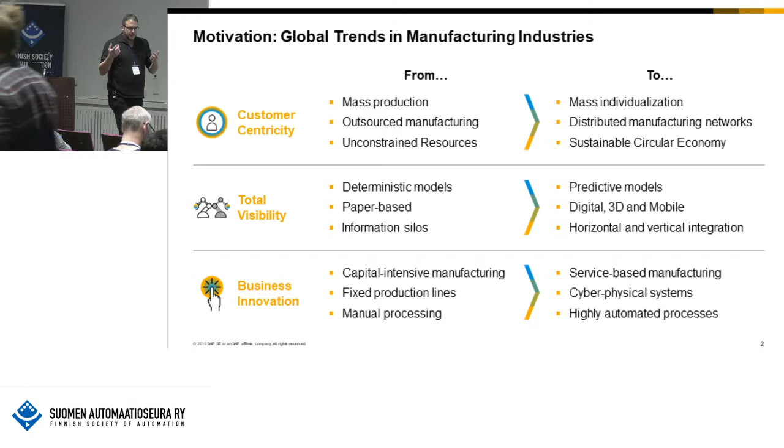But all of us, especially you, if you're representing a manufacturing company in discrete industry, maybe more than in process industry. If you're producing oil and gas somewhere, it's always oil, right? You might change from the same oil field somewhere outside, or after end of lifetime transfer from oil to gas, but these are only two products.

What I have in mind here is much more a company that offers, let's take it a little abstract. Today I produce a green and a yellow product. Everything is perfectly optimized, all my automation assets are connected using OPC UA and so on. So green and yellow product today, but tomorrow the market changes and everybody wants blue products. Now the question is, what do I have to do in my factory to enable my complete company and my factory, my automation, to be ready for blue products?

I think that should be for us all here in the Western industrialized world a driving factor. Certainly I can focus on perfect optimization of costs, overall equipment effectiveness, all this based on OPC, based on connectivity, etc. On the other hand, let's think about at every point in time when doing automation, making it ready for flexibility. That when I do green and yellow products today, the market will come and say I need blue products.

Or yesterday in another speech I had the example of a glass. Today I'm perfectly optimized for small glasses. The market changes, I need to deliver big glasses. And I certainly don't want to completely build up a new assembly line or a new factory only for big glasses.

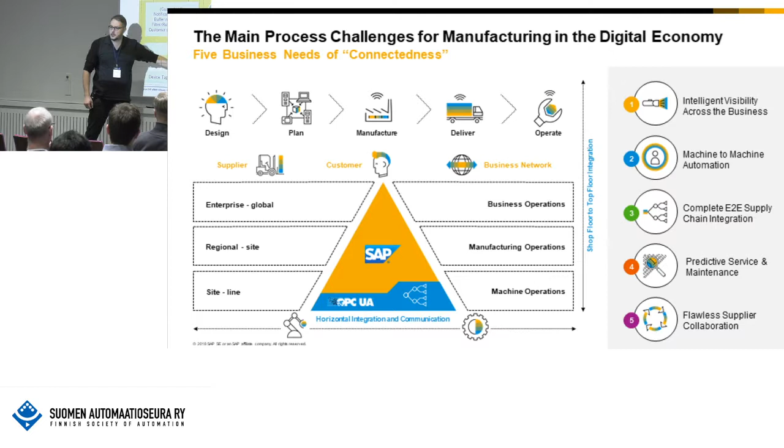I think the 90% case is here on the left side, this thing I call the notification scenario: somewhere a machine, sensor, measurement data, somewhere here a business system, business-like system—the manufacturing execution, the enterprise resource planning, or even the supplier. For example, watching the magazine.

From the sensor perspective, you get a measurement, a new value, an event, a counter, more or less a kind of fire and forget. Technically it could be a kind of pub-sub, but mainly legacy is certainly much more a client-server thing.

Value changes. It goes, in our case here, to something like a gateway, which could say, okay, let's say it's a classical temperature. Below 20 degrees, I don't care. Beyond 20 degrees, I have to inform somebody. Inform somebody could be anything. Is it just recording a time series for doing the big data story, the measuring and analyzing over ages? Or do I need to run in a transaction? So from 25 degrees on, I need to order flowers for my wife because I'm the maintenance engineer and I know if this machine is so hot, I will spend the night to repair it. Could be a transaction, why not?

Actually, it is just about saying notification scenario, relatively simple. On the other hand, I'm absolutely sure it's a lot of work in many cases if I have here a brownfield, an old machine, and so on.

The other side, the query scenario is - as an IT guy, when I first dealt with this area, I thought, okay, it's pretty much like having a simple database access. Select machine status from table. Unfortunately, these machines are not really like databases in many cases. So we have here, in the worst case, an old legacy protocol where I have to define the telegram to send to the machine: please tell me your state, and the response is another 100 characters.

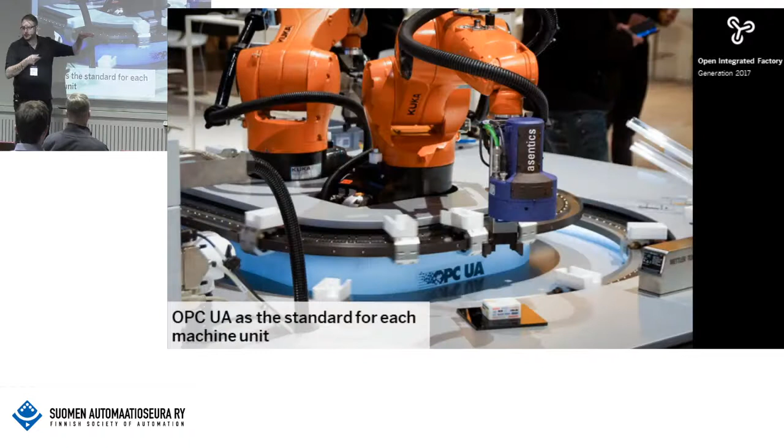Here we use a written buffer. We simply say the physical event that my carrier is on its way to this decision point already takes some time. That's the physical way, by the way also the photo that Stefan has shown. When such a carrier is on its way to do something, similar to this decision point of whether to do the extra order or not, let's assume I send this carrier to a position to do something. This physical travel time is already something I could use to acquire the data I need for this decision.

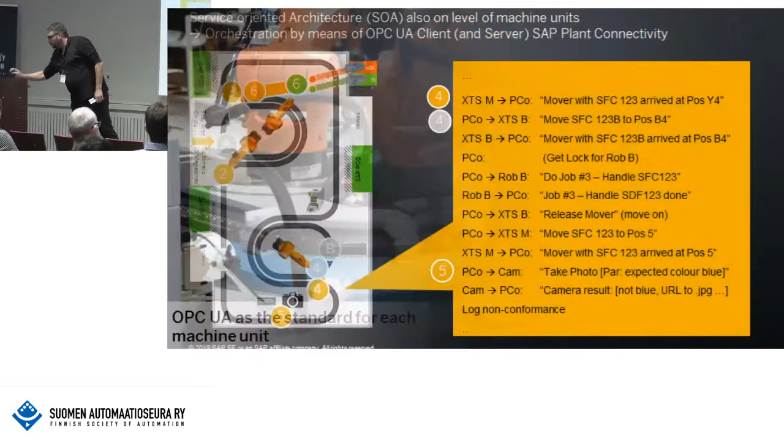So this information that I need later, whether the next order is a special one or not, is already acquired when I start here. When this carrier, these fast movers, arrive here, the memory of my gateway already knows this. So the response, am I a special order, is already known at the point in time when my carrier arrives. I think I have a little bit better depiction here, if I remember correctly. This one, yeah, that's what I wanted to say - let's take the shortcut.

Question? Oh, 5 minutes to go. I'm going out of time. But you got the idea that these business context-driven control loops are very interesting.

Fortunately, this is where I can refer to this morning when Stefan talked about this service-oriented architecture thing - this decision point saying, I am here as a carrier and I've arrived. Now what shall the robot do? Shall it go left or shall it go right? On one hand this is a decoupled business context-driven control loop. On the other hand, what you wanted to express this morning, Stefan, was this robot is just a kind of service provider. The robot can do multiple things. It's certainly taught jobs - it can do this job, but it can also do that job. And the question of which job to call is maybe dependent on this business context, on the order details.

This job for the standard order, this job as an extra check for the extra quality, picky customer check. That's what I want to express here - that we can configure such a sequence in a kind of soft logic controller. We're not doing the physical stuff here. In this setup, I don't tell the robot to start the motor of axis 1 and do 2 rounds and so on. It's much more that the robot knows I can offer a service - which service, the job number? Shall I do service job number 1, this one, or shall I do job number 2, this one? And exactly this decision could be dependent on my order details - master data, bill of material, all these things could be the influencing factor.

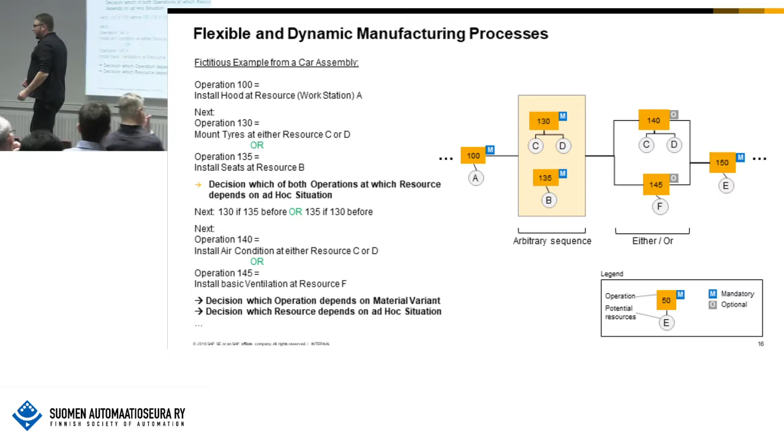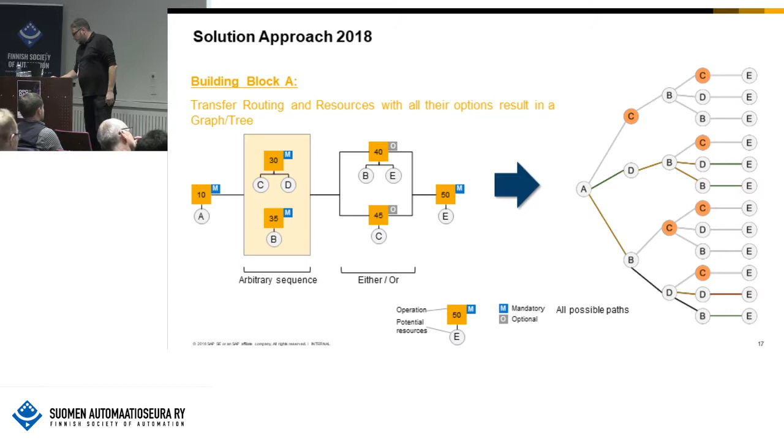For one order it might be relatively simple because one production order has, in such an example, one graph. So if I start here with installing the hood for my new Audi, whatever A3, I can decide, shall I go first to the wheels, shall I go first to the seats? A simple directed graph.

If we go from the perspective of many orders at the same time in a factory with many devices—seat station, wheel station, all connected via OPC UA, with live data on a near close sub-second basis—I need this live connection and sub-second basis for managing this complexity.

This is going then close to artificial intelligence, to make ad hoc decisions on a second basis. Because imagine, if this station is down at this point in time, I certainly want to reshuffle and say, okay, maybe I need 10 minutes to set this station up.

The maintenance engineer is coming and fixing some things, but in the same time, while this is down, I could send some of my vehicles to the seat station and catch up with the time later. So unforeseen, as always—human beings and also enterprise resource planning systems are planning, and the gods are laughing and saying, haha, I spoil your plan, this station is down, take a new decision.

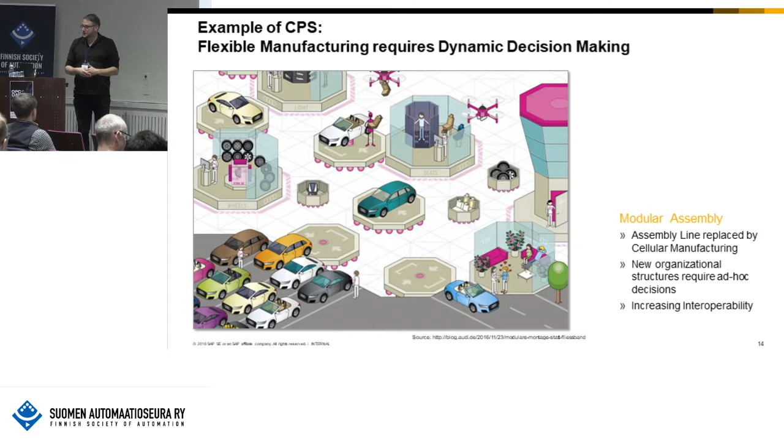Here I think there's a lot of potential, independent from SAP, for many of us to say, use OPC as my ears and eyes into reality, and now we are combining this with artificial intelligence, taking the data that I anyway know—master data, bill of material, order details, and so on.

Then we are soon on the way to solve even such complexity so that I can always do something. Picking out, for such a production issue, the mathematical best option is really tough calculations that can take hours, but the algorithms exist to give you in 10 seconds a good solution.

Quick keyword here, Monte Carlo tree search approaches and so on. You might have heard about AlphaGo—Google beats the Go champions, chess computers, and so on.

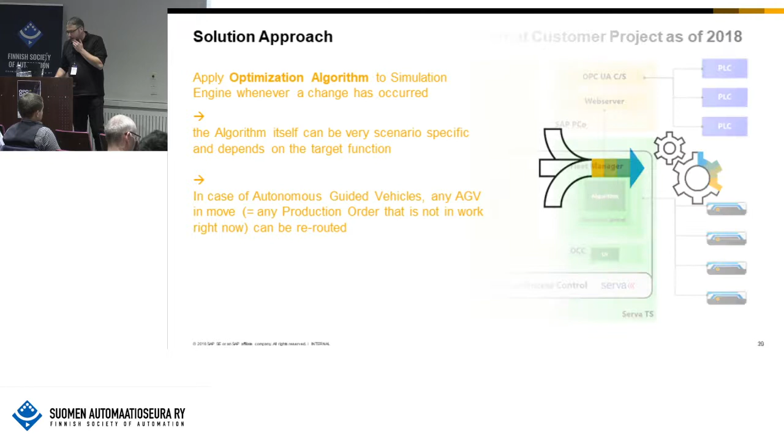Anyway, time is unfortunately almost up. I would have had a couple more stories, like talking about reuse, or Umati—Andreas talked about the companion specifications. Here it's for the machine tools with some dedicated use cases that I want to represent.

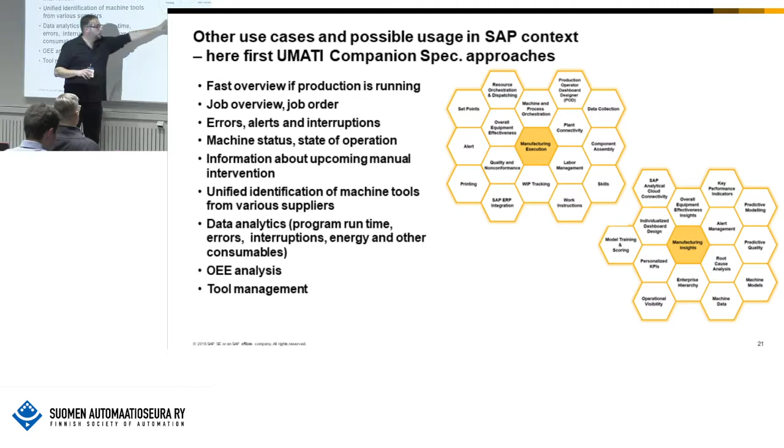Here I would have shown, if I would have time, scenarios where plugging into manufacturing execution, into an enterprise resource planning. I would have shown how user interfaces would look like, and from overall equipment effectiveness, but even much more—this is then again a bit the domain of an SAP, to make this planning board, knowing here's a machine breakdown, now a human being is reshuffling, and so on.